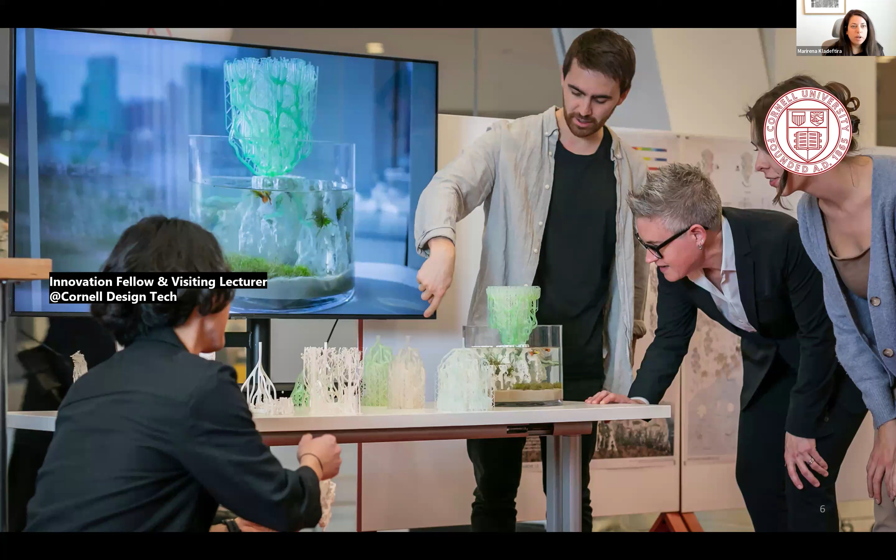And after my PhD, I wanted to change context a little bit to pursue a different research. And so last year, I joined EPFL in Lausanne in Switzerland as a postdoc researcher. And as of this year, actually, my academic home is Cornell. As you heard before, there is a new department of design technology that was inaugurated last year. And this is really a radical collaboration between disciplines in design, sciences, engineering, and technology, where my work is also intersecting a little bit these disciplines.

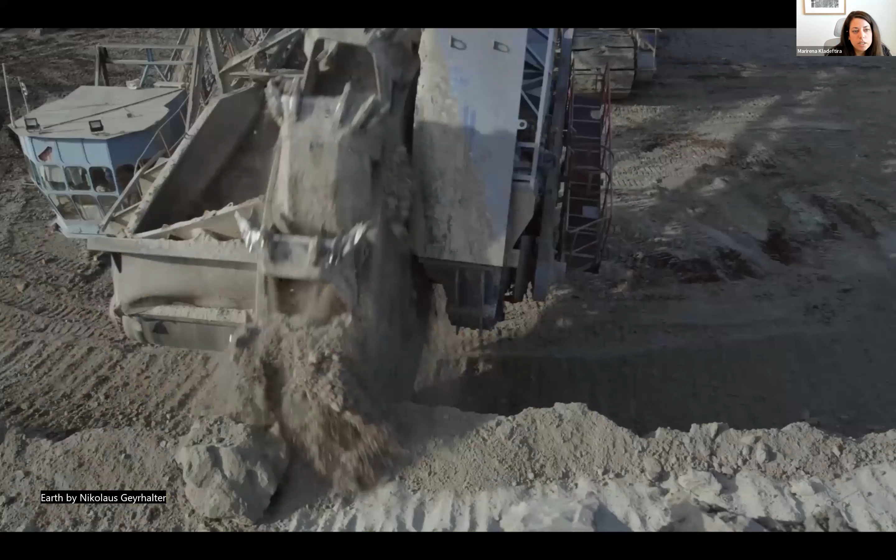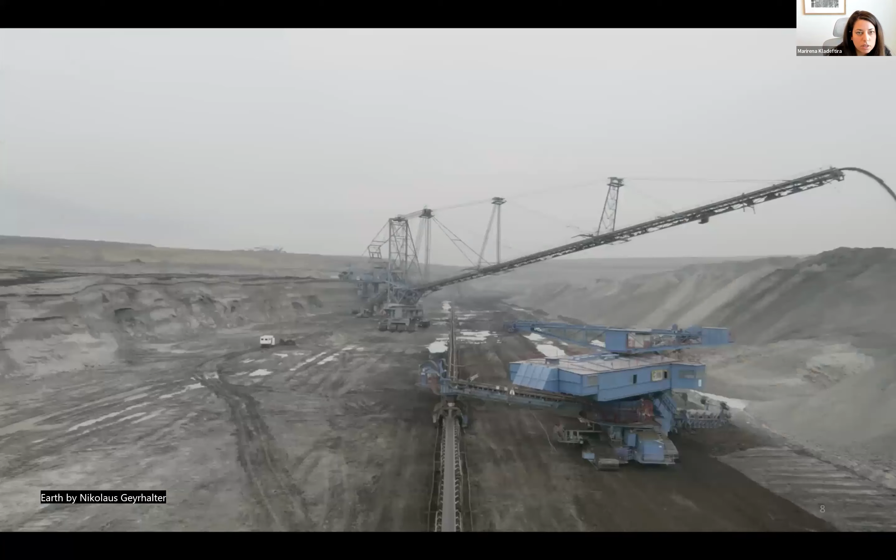So probably all of you know that our practice today is veiled by crisis on multiple levels, but understanding the enormity of the construction demand we are facing, we cannot afford to not reevaluate our building methods. And although as architects over the course of history we have also been actors in constructing these oppositions between our values and our practice, we still continue to drain our natural resources. Construction is responsible for almost half of the global resource extraction and around 40% of the total CO2 emissions. But even though we are aware of the stats, material use in construction is still expected to double by 2060.

And at the same time, we have seen the effects of this impact we have on the environment become more and more vivid every day. We have seen the loss of human life and human production, as you're all aware of, for example, with the recent fires in California, and not only that, in many parts of the world, different kinds of natural disasters are occurring. At the same time, we are aware that in our field, there is a staggering lack of skilled workers.

This is making headlines year by year. We have a problem filling positions. There are articles out there or demands that actually look at decreasing the age limits for participating in construction. So this is also a reality that we have to face.

But at the same time, we do live in a world that is engorged with digital technology; it has become an essential part of our daily lives. And somehow we're still kind of trying to find ways that this will permeate the construction sector and our practice.

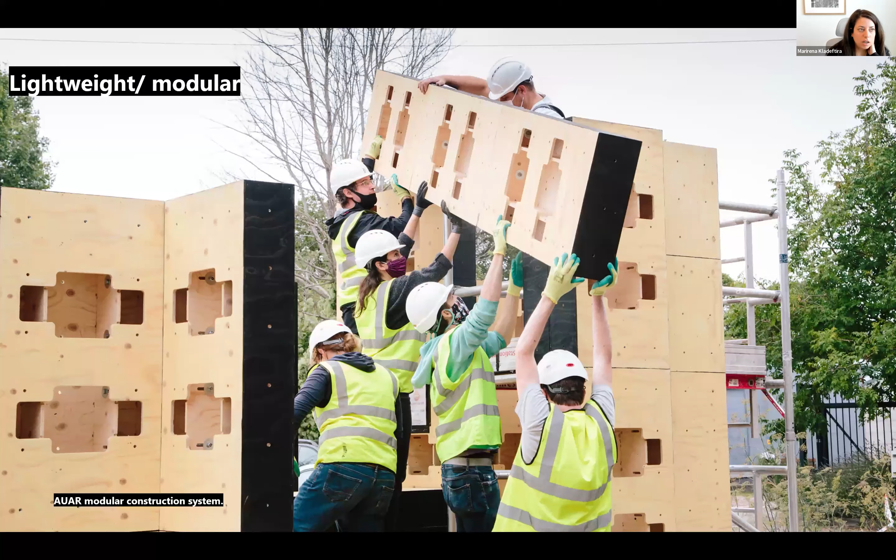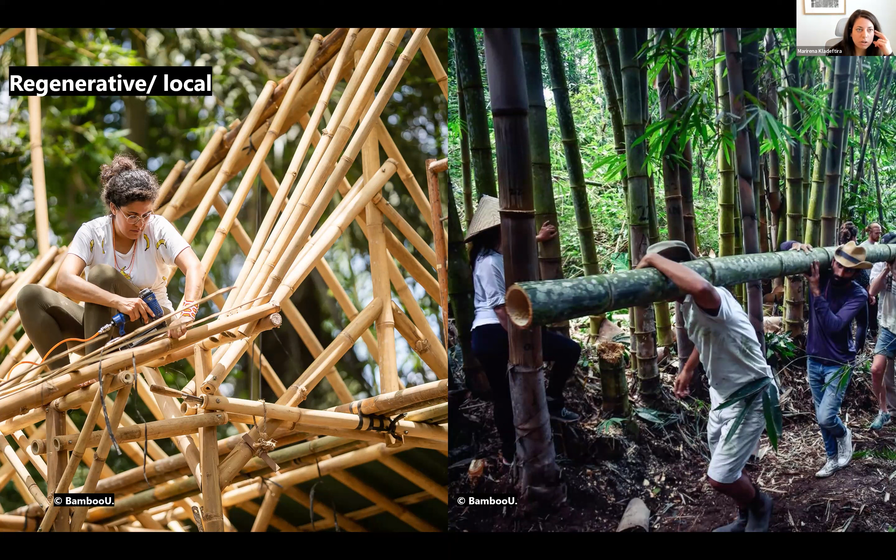A little bit of an overview of what has been happening. So current research streams that are trying to tackle these challenges in construction deal with lightweight and modular systems. Also, they look at the use of regenerative or lightweight material systems that can be sourced locally, potentially, to limit these over-globalized models of production.

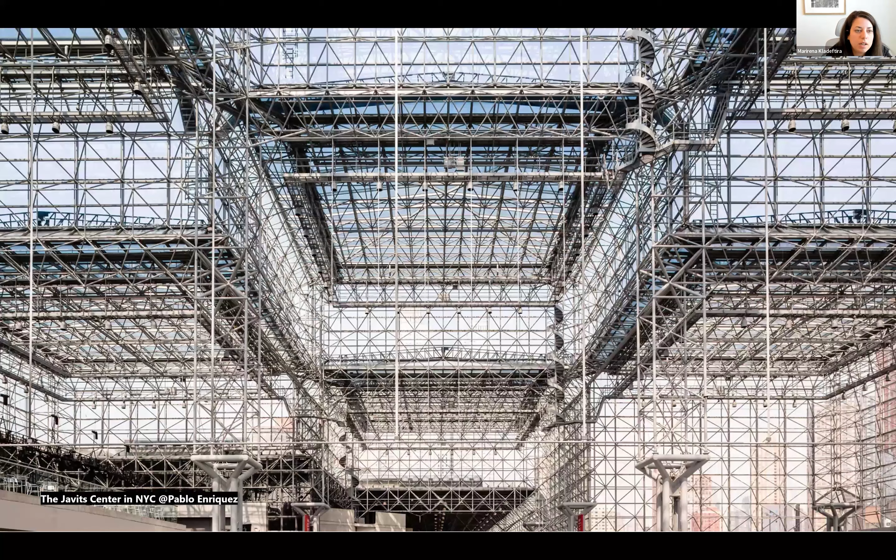And also they look at circular building practices where components can be repurposed for multiple life cycles and promote the use of kit-of-parts systems. Interestingly enough, space frames as a structural system encompass all of these qualities. They are lightweight, modular, they are very efficient structural systems, and they are polymorphous. They can take many different forms.

But we also know that current industrial systems have limited configurations, and that is because they're trying to reduce the logistics and complexity that's associated with their connection systems. And this context and this idea was actually the beginning of my doctoral research, titled Capsules of Complexity, which really reflected this idea that joints in architecture hold a transitional space and act as mediators between materials, forms, and assemblies, but they also articulate space and define aesthetics.

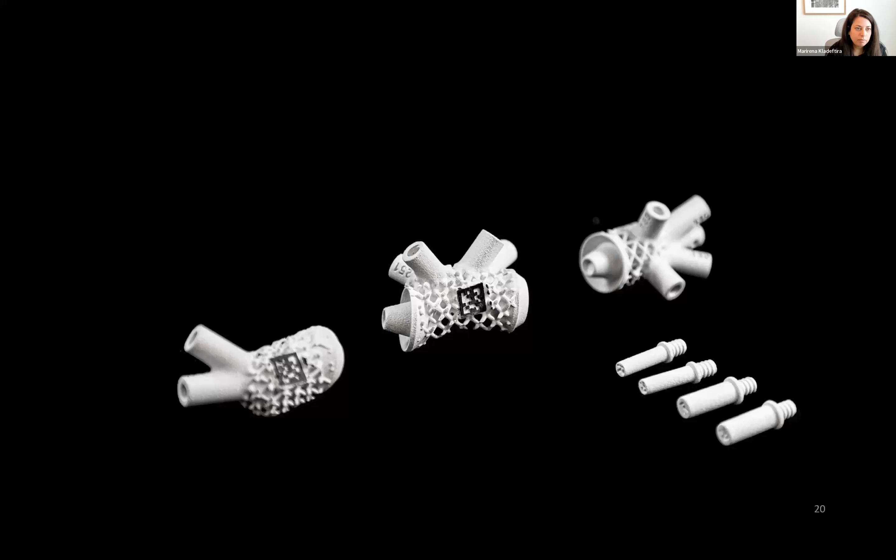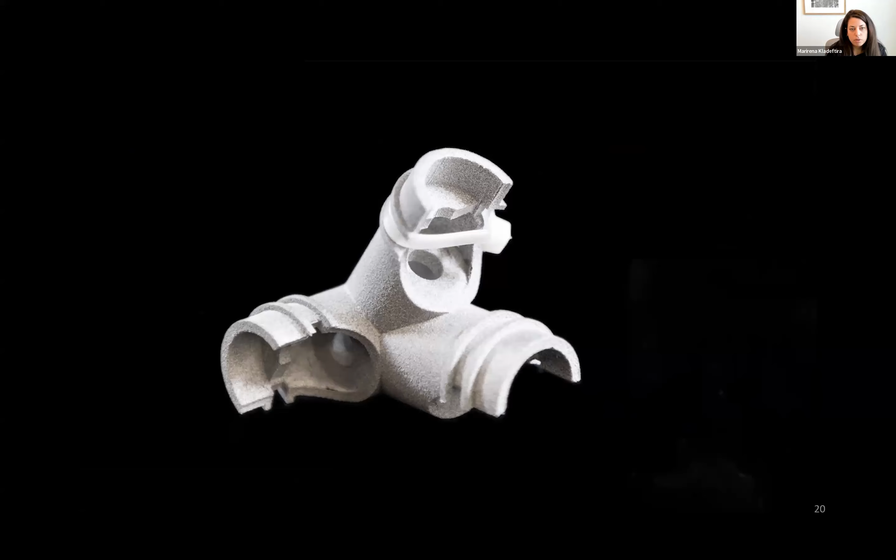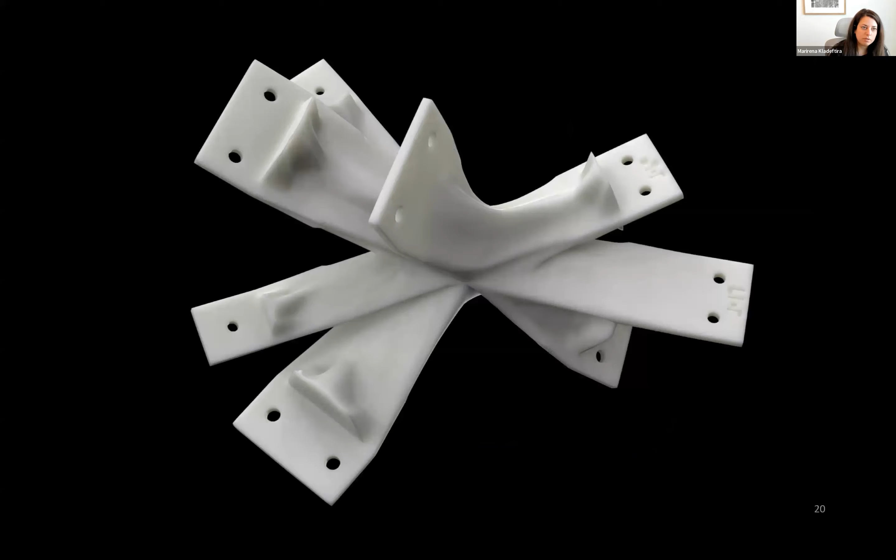And as I said, what is really interesting about the system is that the joints are those components that determine the form, the assembly and disassembly of the structure, and also how circular or reconfigurable that system might be. For me, that really created an opportunity to encapsulate all these parameters in these very small components. So by distilling intelligence only in the joints, we can have maximum impact on the performance and formal quality of the structure. At the same time, with 3D printing, we now have new opportunities to fabricate adaptive structures and components.

But much of the research that had been done up to that point saw these components almost as non-design objects, but rather as optimized engineering parts. So the goal was really, how do we optimize for using less material that we can now fabricate with 3D printing. However, this thinking is removed from the bigger architectural problem, which is that when we design a structure, we employ maybe hundreds or thousands of these connections in one structural system.

And my position here was that there are actually too many factors to consider, and we need to tackle this in a more holistic manner. And so we can concentrate all these parameters that affect the structural system and its footprint around four pillars, maybe, that have to deal with design, the materials that we employ, how we manufacture them, and also the assembly processes by which the structure is erected. Based on those, we can really understand the system better, but also evaluate and contribute better to its ecosocial footprint.

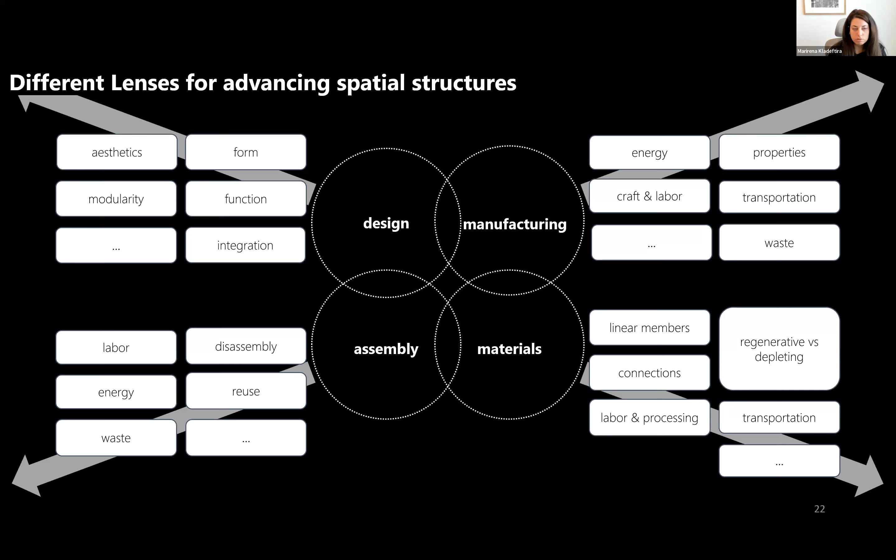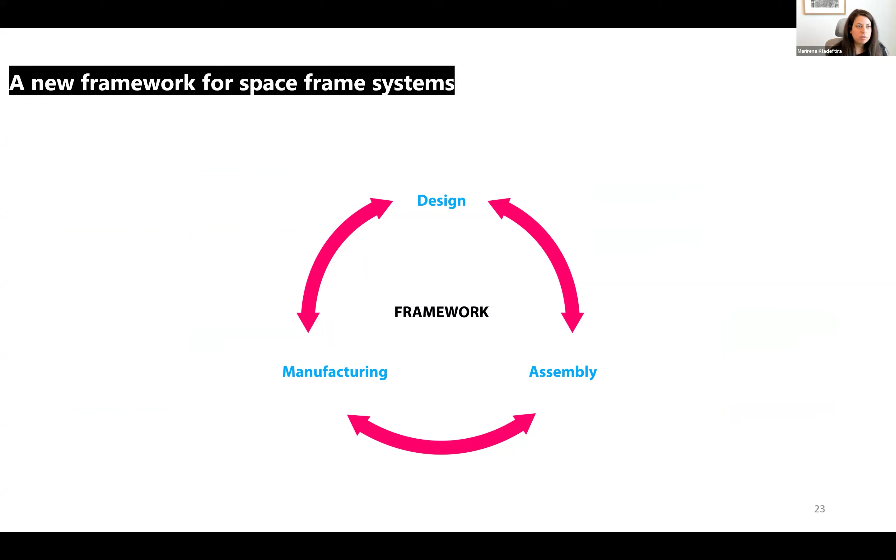And so for my PhD, I created this design and fabrication framework around these three parameters: design, manufacturing, and assembly. And I had the opportunity to test this on different structures and systems that examine different aspects of this framework to achieve ultra-lightweight construction.

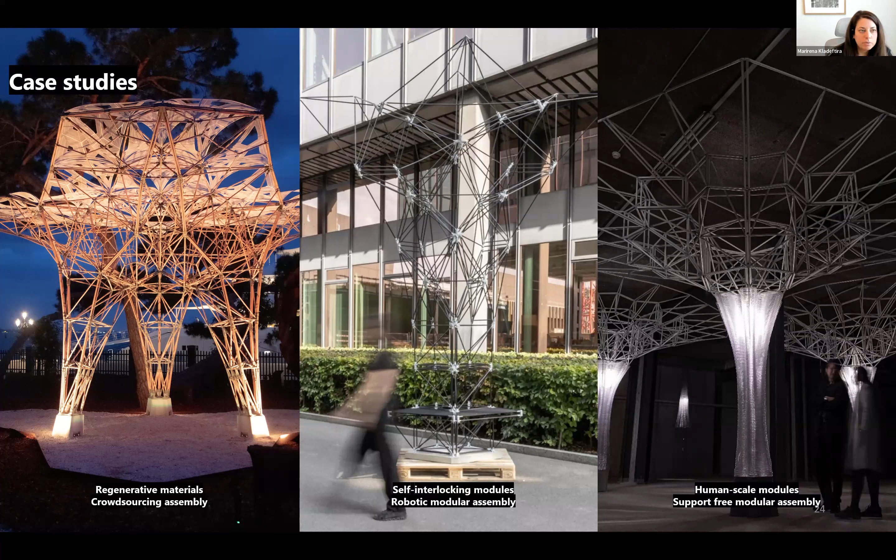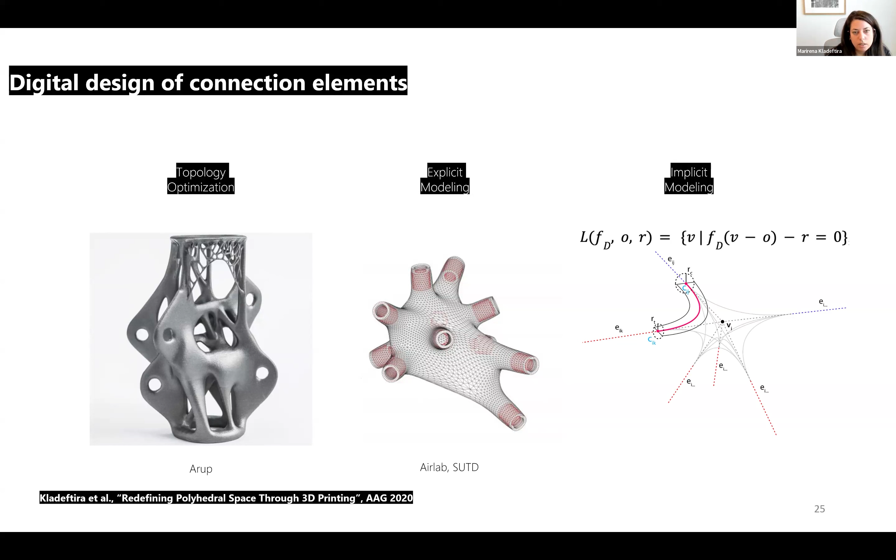So focusing a little bit more on one aspect first, the design. There have been different design methodologies for bespoke connections. As I said, a lot of the existing research looked at topology optimization as a design strategy to reduce material. And other researchers have been looking at the use of explicit modeling, which I will explain in a bit. But my argument was that topology optimization does not really allow for design intention to be embedded within the system, while explicit modeling is more difficult to control and to generalize for a lot of different systems. And so I proposed the use of implicit modeling for the design of connection systems.

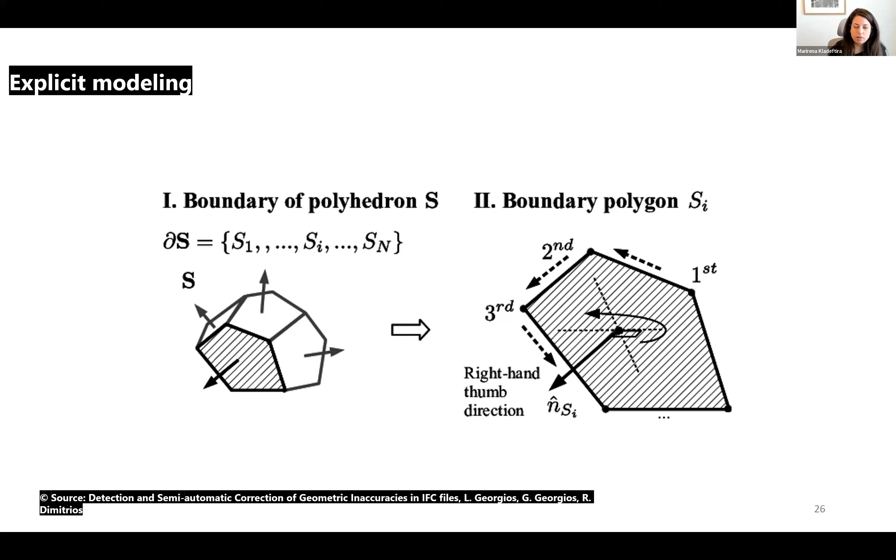So what do I mean by explicit modeling? Explicit modeling really refers to the description of forms with explicit points, edges, and surfaces. You might be most familiar with, for example, mesh modeling or NURBS modeling, where you really describe the outer surface of an object. Implicit modeling defines geometry a little bit differently. It defines geometry as the locus of a distance function in continuous space.

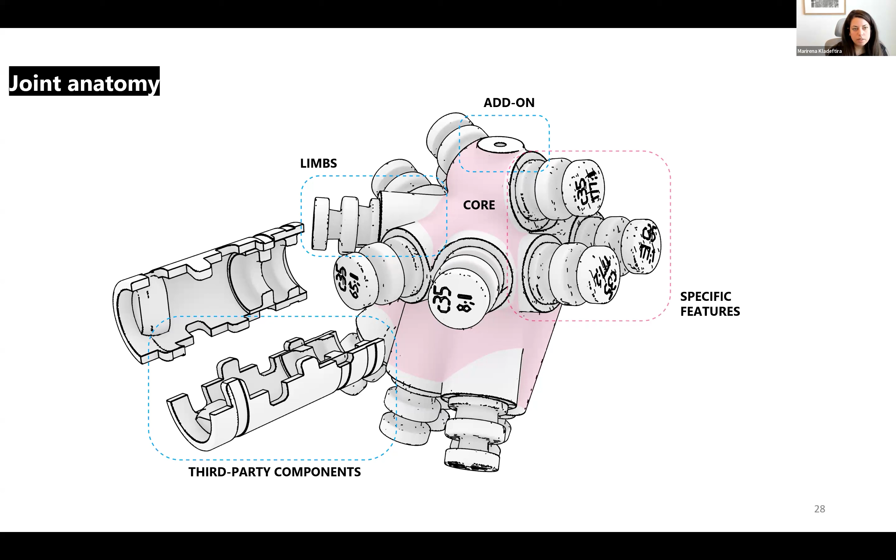That gives us much more freedom to design more complex geometries. So in this case, using this strategy, we can modularize the joint design. By modularizing, I mean we can divide this into discrete functional components that you see on screen, drawing from a vocabulary of details and specific geometric and functional properties that can be combined or fused together at will.

This can be done with just simple mathematical operations and functions, by assigning different parameters and functions that relate to specific geometric features we need at all scales in a computational model - at the scale of the structure itself, but also at the scale of the struts of the space frame, and at the nodes.

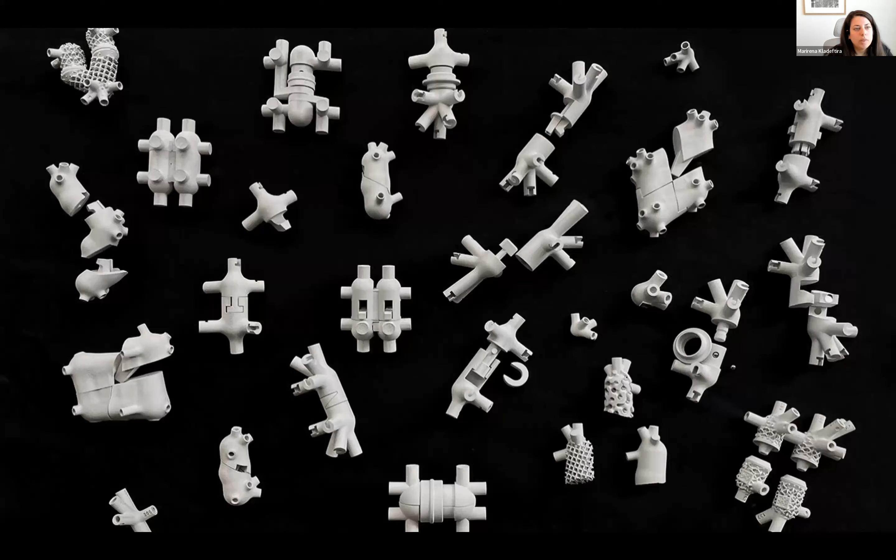In this way, we can really tailor each connection for its specific location in the structure, add special requirements for assembly, or have local transformations and tailor material-specific constraints when working with hybrid material systems, while maintaining a coherent architectural vocabulary. This is an example of how such a framework can be beneficial.

Using this kind of strategy, we developed the Digital Bamboo project. This was a research and teaching project for an ultra lightweight structure made of unprocessed bamboo canes and 3D printed connections. It negotiates equilibrium between biogenic and artificial materials, standard and bespoke parts, and relations of part to whole.

This system is extremely efficient. It weighs only 5 kilos per square meter, but shelters an area of around 40 square meters in this case.

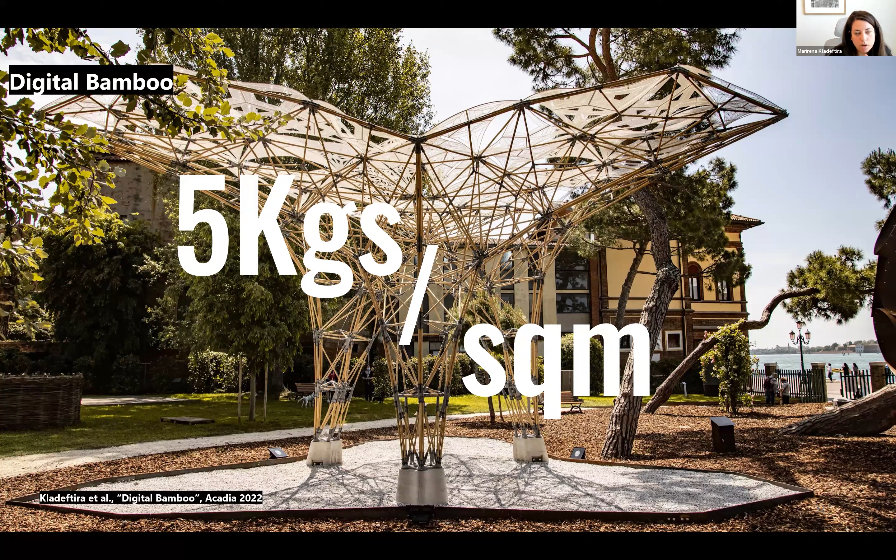Why did I decide to work with bamboo? We know global material use will continue to intensify, but if we look at the data more carefully, most of that activity is expected to happen in the global south. Bamboo is a local material native to the global south. It's scalable and renewable, with a very short harvesting cycle - depending on the species, this can range anywhere from 5 to 10 years. It also has a natural shape that performs very well under axial loading.

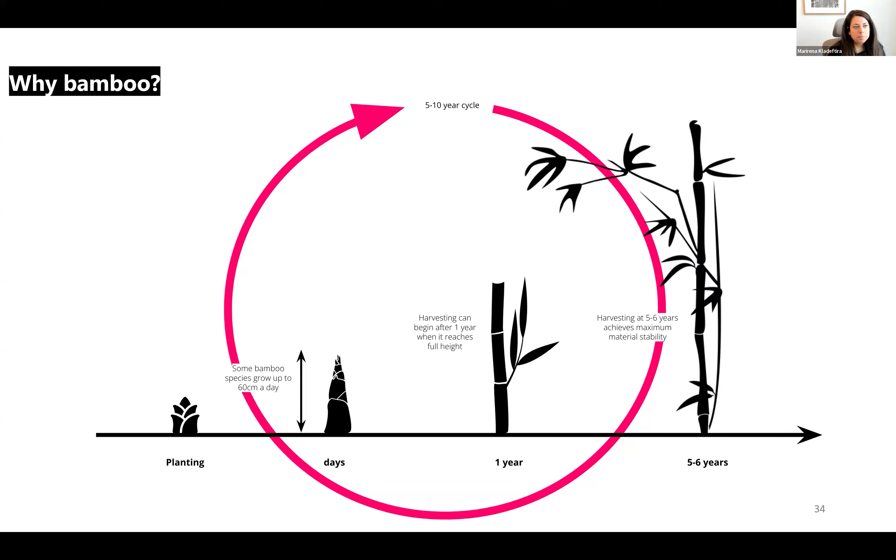At the same time, bamboo still remains a craft-based system today. Often we've seen that the scaffolding structures to create bespoke buildings become more laborious than the structure itself. So the question was: how can we create a system that is adaptive to the natural variability that bamboo has, which is also the factor that hinders its compatibility with standardized systems?

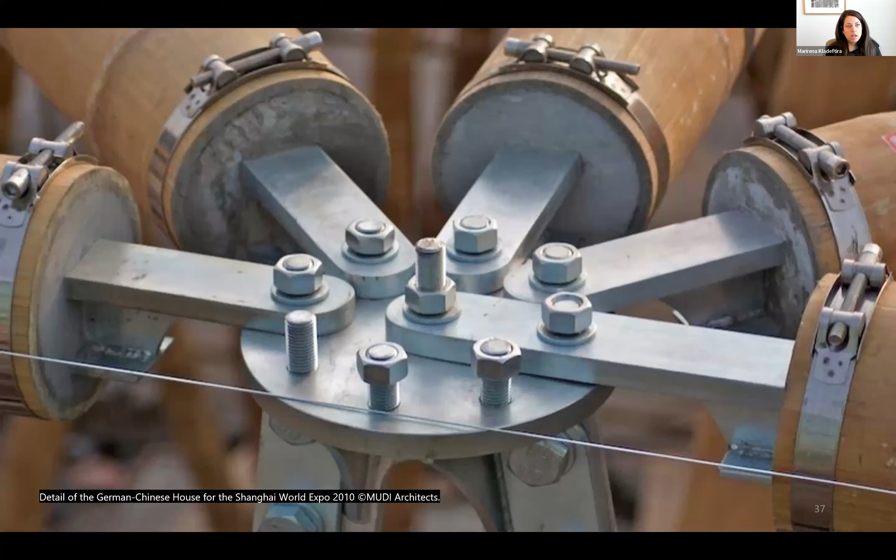When we've seen that attempted, it has resulted in composites like the one you see here, where we often see cement or mortar cast into the pole itself to establish a kind of structural connection with existing pieces.

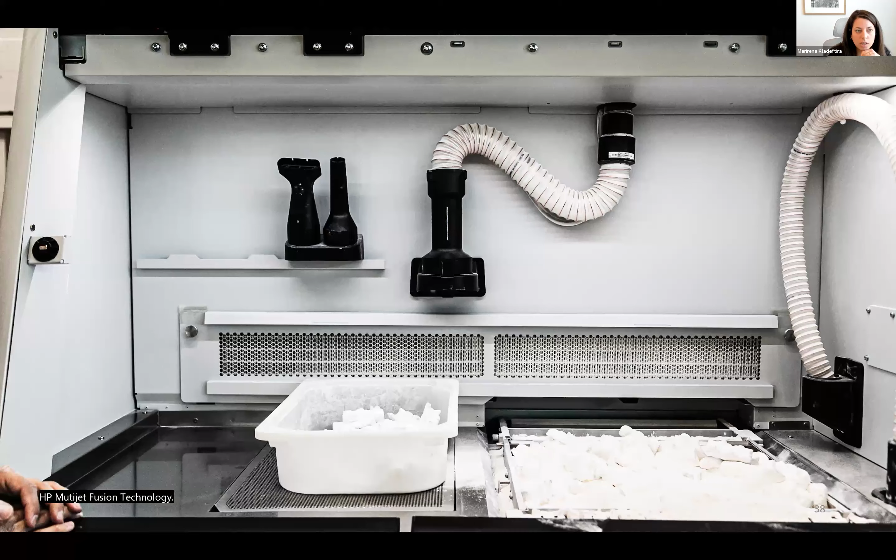Coming back to this framework, we can actually identify a better material pair. Instead of using metal components, which as a material outperform bamboo by a lot, we can find a material with maybe a comparable or slightly better strength than bamboo - in this case, high strength nylon produced with multi-jet fusion technology from Hewlett-Packard.

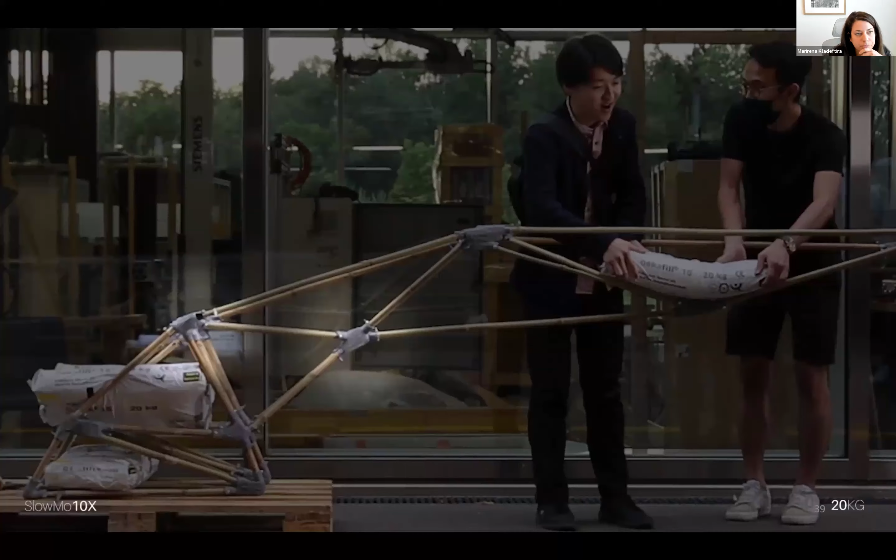We tried to use this technology, and at the same time I was teaching a studio at ETH in Zurich, where with a student we experimented on these new joint systems you saw here. It was during COVID, so we had to test our structures outside, not always with great success.

As we experimented with different connection forms and connecting geometries, we observed something quite interesting. Instead of a regular pin connection often found in reversible connecting systems, we found that notching the bamboo actually performed a bit better in testing, because it distributed the stress over a larger material area.

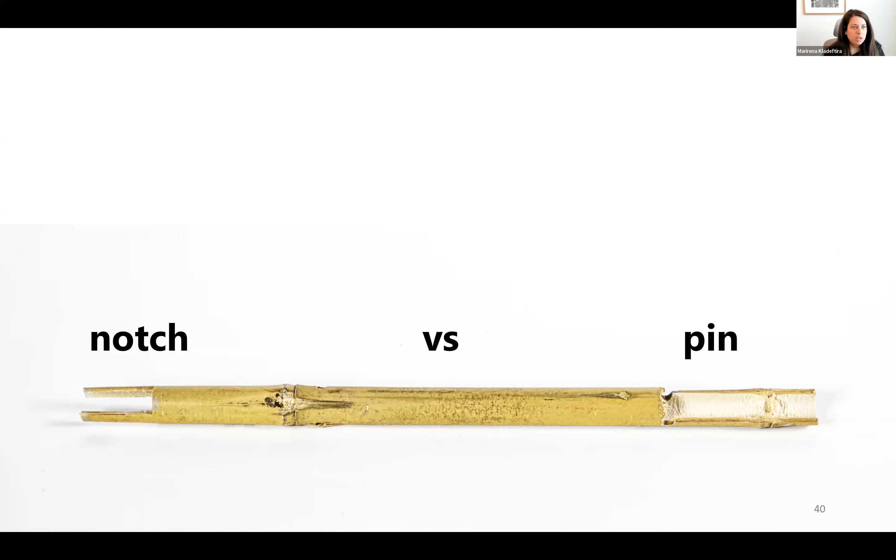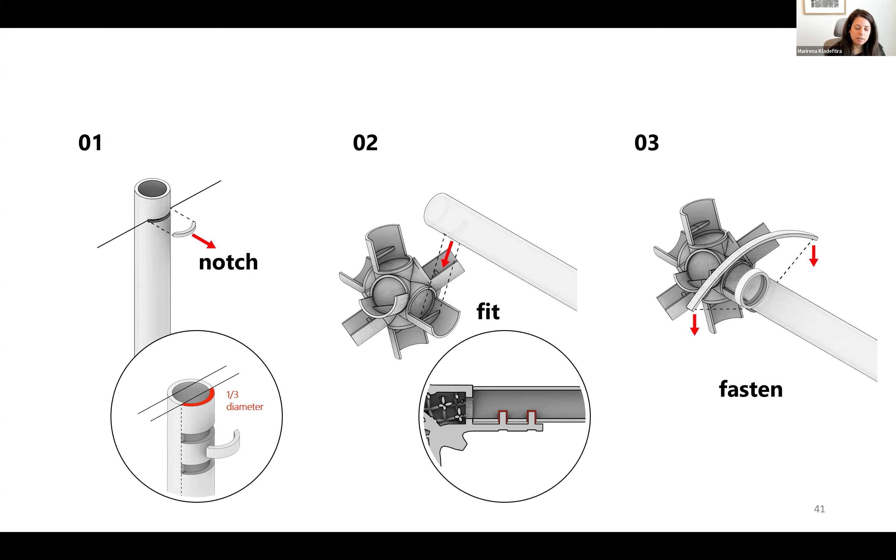So we went a bit deeper into this idea of how to create a system with this notching technique, and also a system that respects easy assembly and avoids processing the bamboo pole itself, as that was a key requirement for me. I wanted to avoid entirely the processing of this kind of raw, variable material.

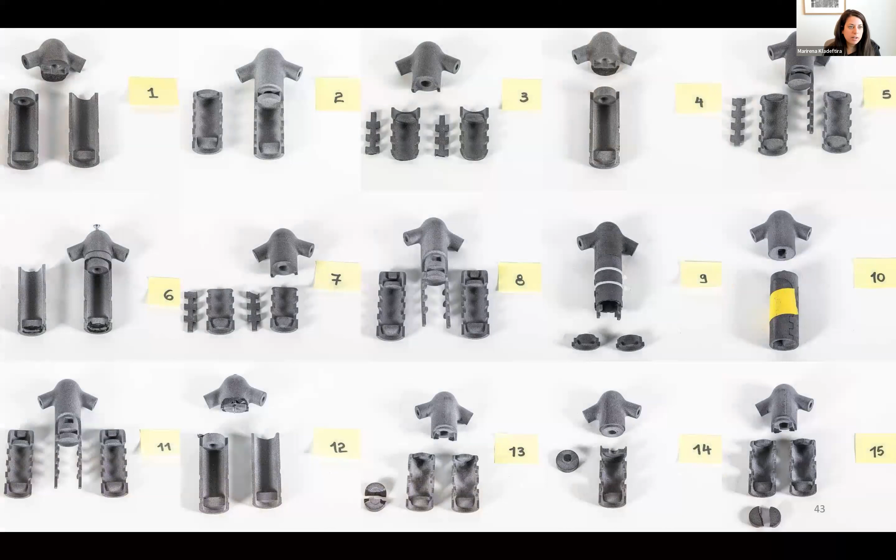I put this video here because I find it extremely funny. This project was developed during COVID, so all the labs were shut down. We had a very new connecting system that we didn't know how it would perform, and we had to become more creative about testing this material system. So we made this kind of haphazard setup that you see here, and with that, we were able to test an intensive series of evolutions of these jointing systems.

We did this by partnering with researchers from structural design at ETH Zurich to understand the mechanical properties, specifically how this connection performs under tensile loading. That was also our design process to optimize this connection for this material, and we were also able to validate it with graphic statics to make sure we have equilibrium in the joint design as well as in the design of the structure itself.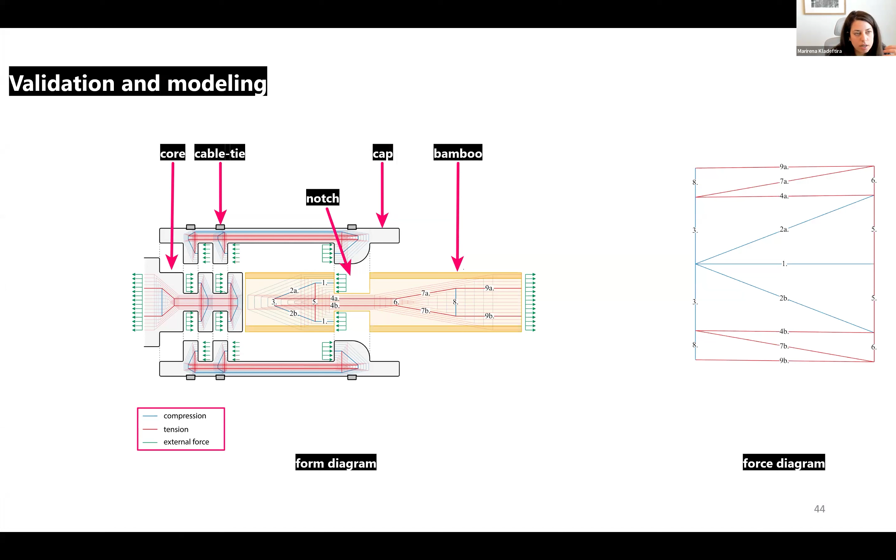The final joint really features a connection to the bamboo through two standard externally interlocking components that you see here. These also feature rotational freedom that helps in the assembly, especially at acute angles or in very complex systems, really capitalizing on human agility to fasten that connection.

At the same time, what you see here is these two parts. We have the core that I showed earlier in this modularized joint design strategy, and that core is always the bespoke part—the part we would need to fabricate differently every time. Whereas the caps in this case are standard, and we could even mass produce those with a different method.

This system was really interesting as we wouldn't need any other special equipment, and we could really imagine employing this in regions where there isn't access to other technologies or specialized knowledge.

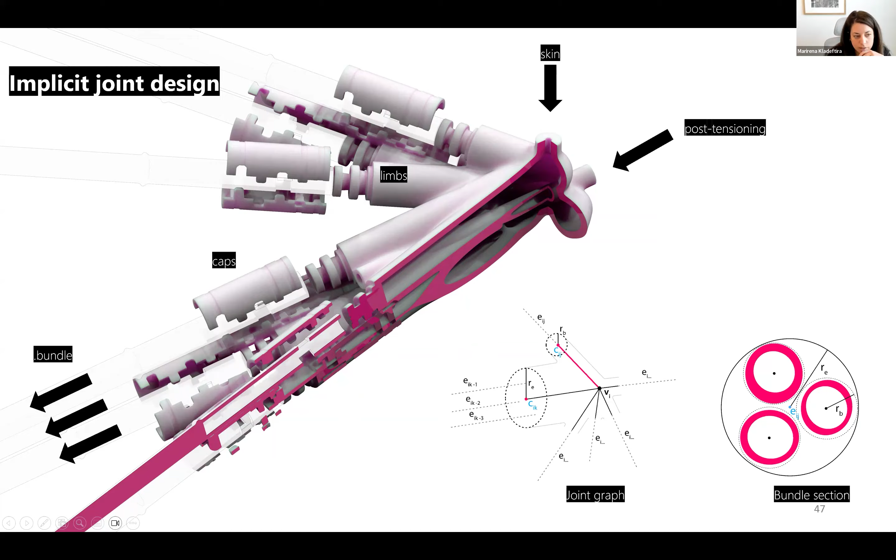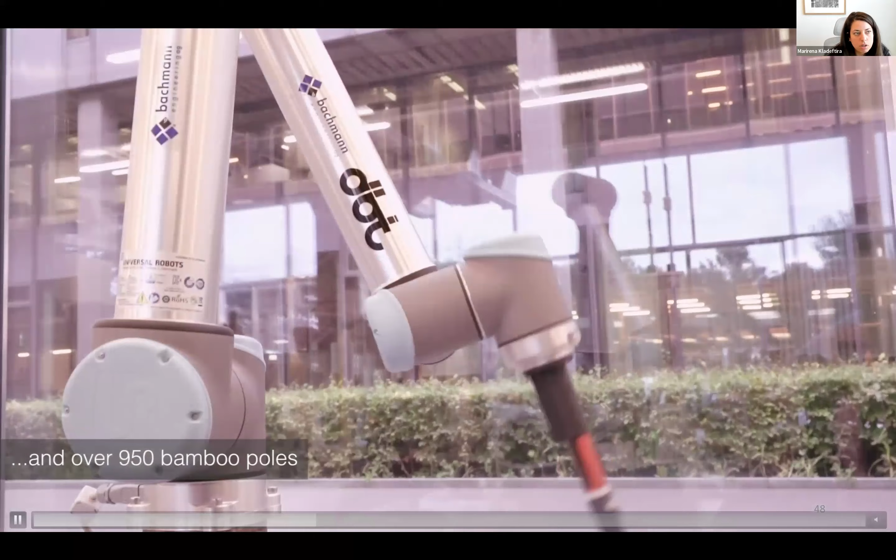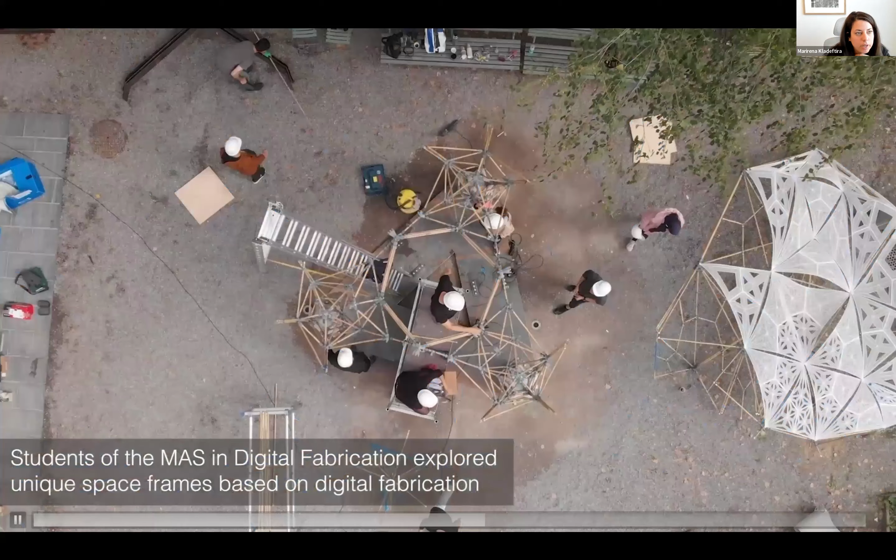I have a small video that shows a bit of the process. What was really interesting is that by using this off-the-shelf technology, we could outsource all the production to 3 different manufacturers. The joint production took only a few days, even though we had, I think, more than 300 joints in total. The skin you see here was also produced in-house.

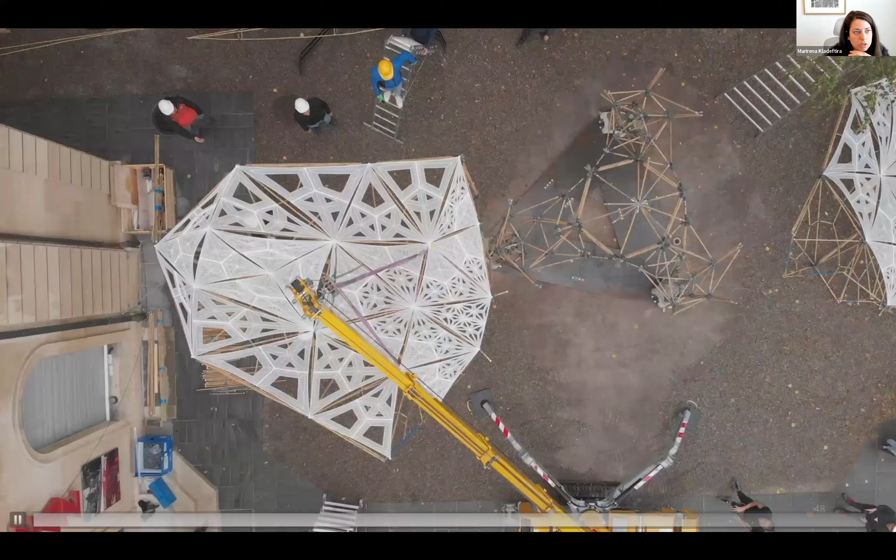We wanted to keep this lightweight theme, so we used a very lightweight mesh textile that we formed on top of stiffening ribs, which gave catenary form to the panels that cover the structure.

After an initial exhibition in Zurich, we were invited to exhibit the structure during the Venice Biennale, in the Time Space Existence exhibition in 2021.

We disassembled the structure, flat packed everything, and transported it all, including the foundation and the skin—approximately half a truck, if I remember correctly—and reassembled it on site. Since the joints were designed for intuitive assembly, we could crowdsource the assembly in Venice to local workers with no prior knowledge of the system, and they managed to build it in under 3 days, which was quite a success in my opinion.

And here you see everyone involved in the project.

So in this platform, we could really showcase how combining unprocessed biogenic materials with small digital components can lead to hybrid systems with minimal footprint on-site time that can also be designed for disassembly.

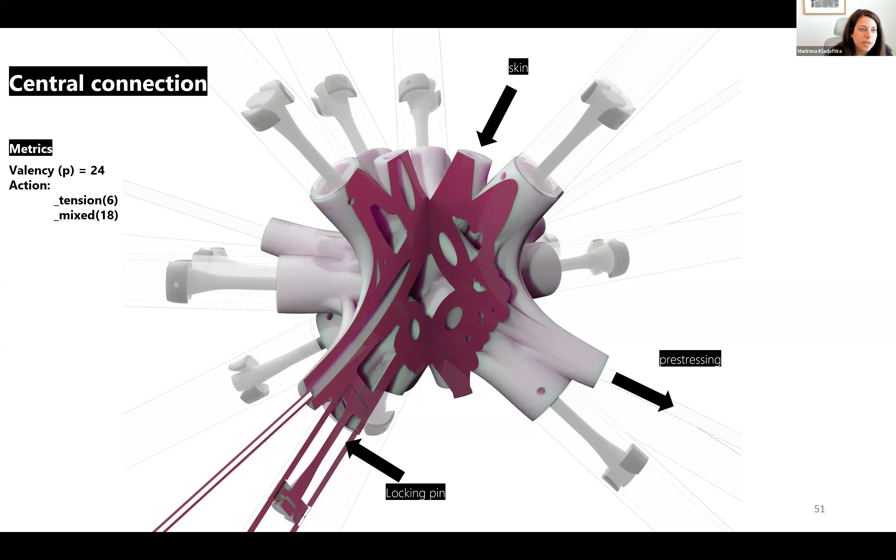Because of that complexity and high concentration of forces, I designed this different joint still with the same framework that I described before, but this time it was specifically designed and optimized for 3D printing in steel with laser sintering technology, which is what you see here.

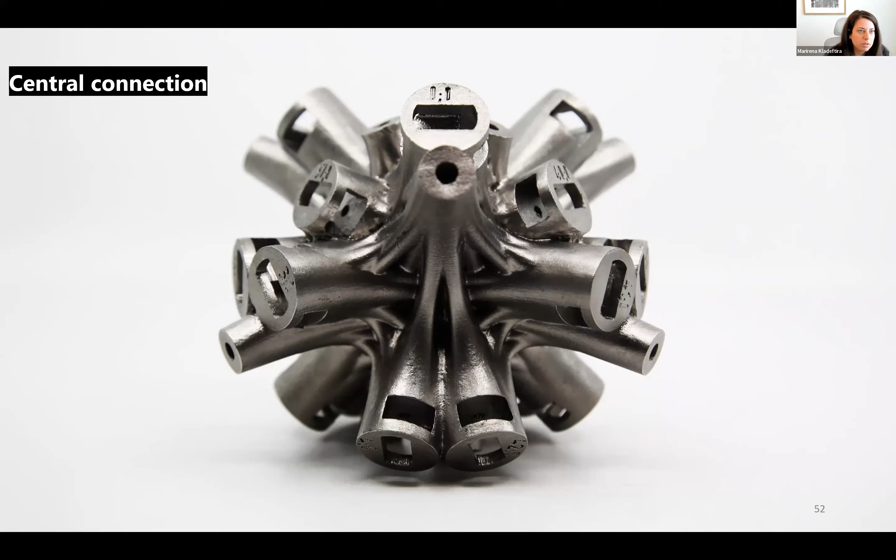Although this 3D printing of steel was only used for this one component in the entire system, it was disproportionately expensive, time and energy consuming than the fabrication of all the rest of the components in the structure. And this really was upsetting for me.

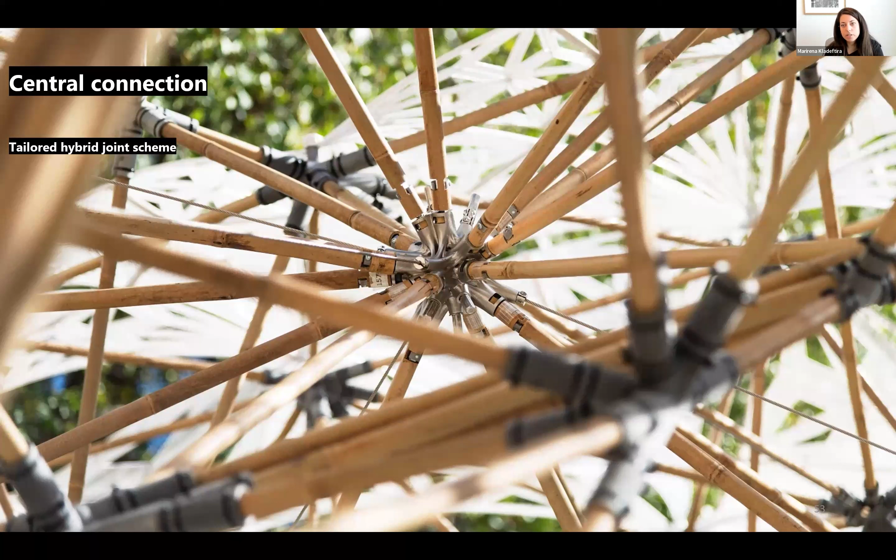So in my search for a low cost but high resolution production method for metallic components, I actually discovered that there is a gap in the industry and existing processes. And so I initiated a collaboration with the German Fraunhofer Institute to look really into complex low impact metal manufacturing.

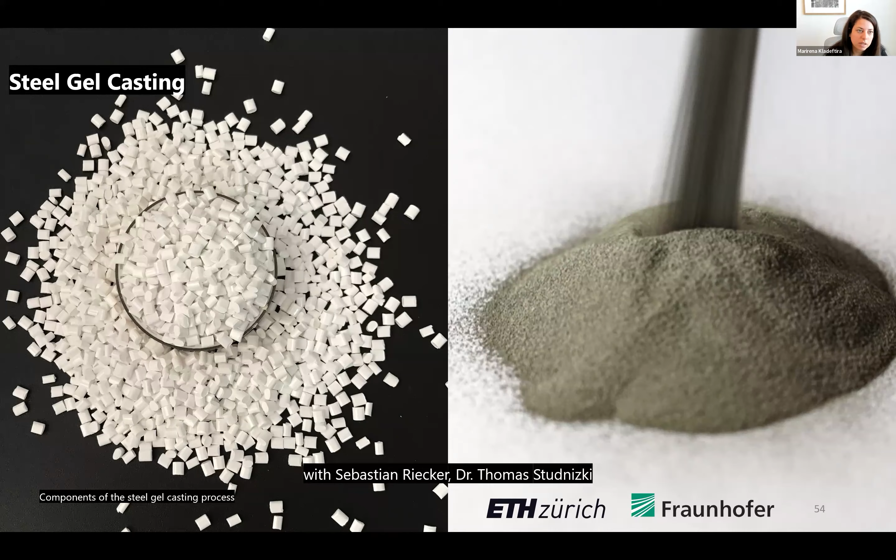Sebastian Riecker is a researcher there at the Fraunhofer and was looking at the time at a process called gel casting, which has been used in the past for the production of complex ceramic parts. The idea really was to transfer this process to steel components that can be produced with low cost and at large quantities.

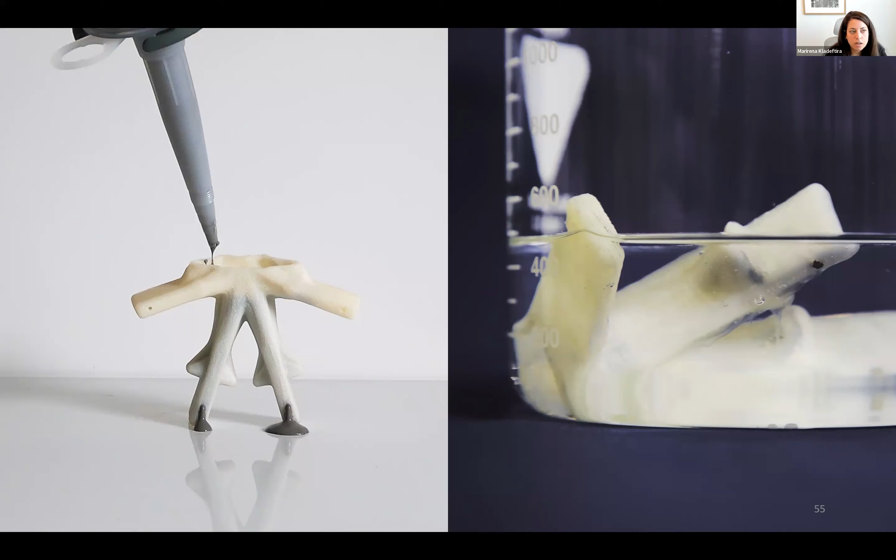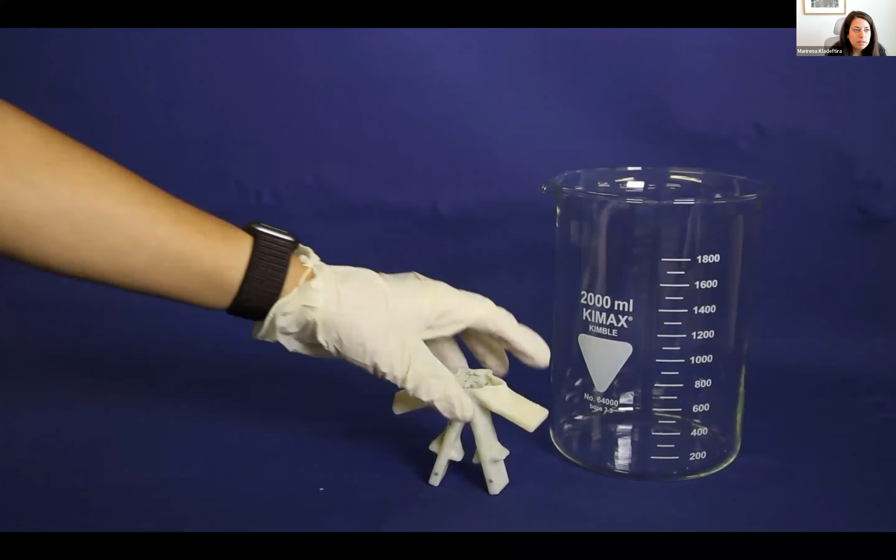So what is really gel casting? We have this aqueous solution that has a high concentration of metal powder, and that is cast at low temperature into 3D printed polymer molds. Then this cast is left to dry at room temperature, and then this is introduced into a solvent bath where the mold is actually dissolved, and this exposes the green part.

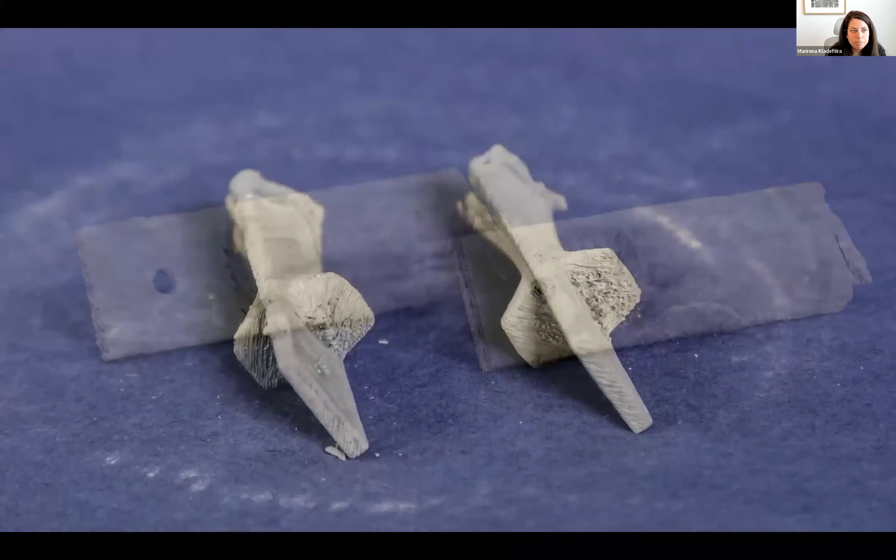Then the green part is introduced into an inert oven with specific controlled temperature and atmosphere, and then the part is degreased and sintered.

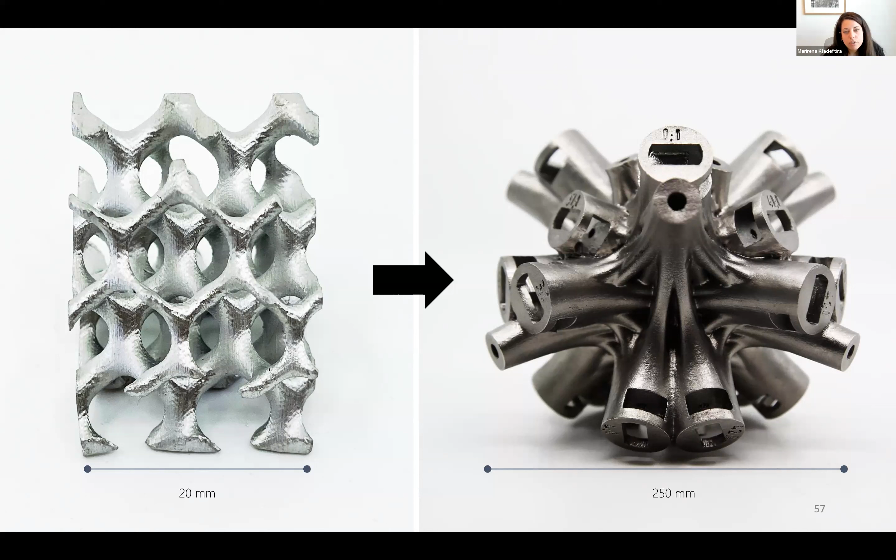What was the challenge here? Our initial experiments were only these tiny parts. If you ever work with material scientists, this is already a success for them - like this 2 centimeter piece, complex piece, is already a big success. But of course, such sizes are not really relevant for architecture.

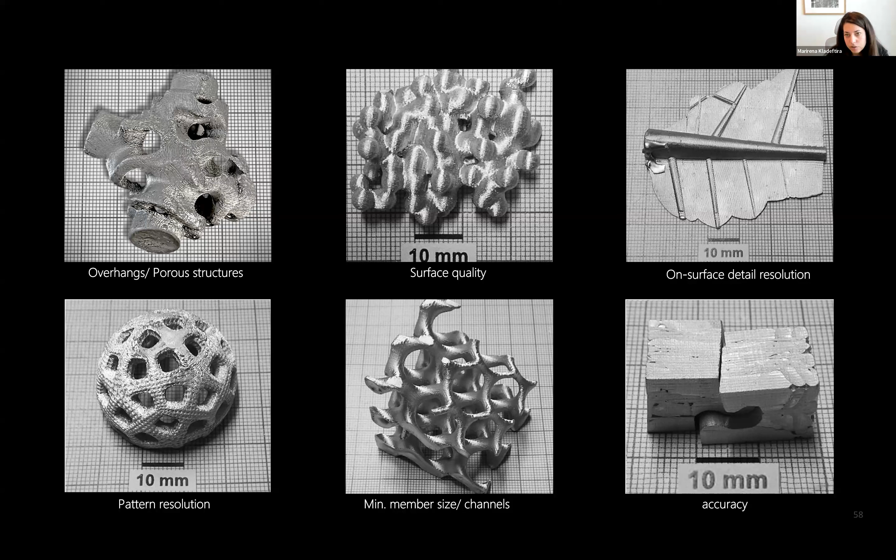So we started to think, how can we scale up this process to make it relevant for architectural scale? I had some material saved at home and started doing some more fundamental tests that may seem random here, but actually they try to find the relevant properties that you would get in your material specs leaflet for any 3D printing technology - things that have to do with surface quality, minimum resolution, resolution of on-surface detailing, accuracy, and so on.

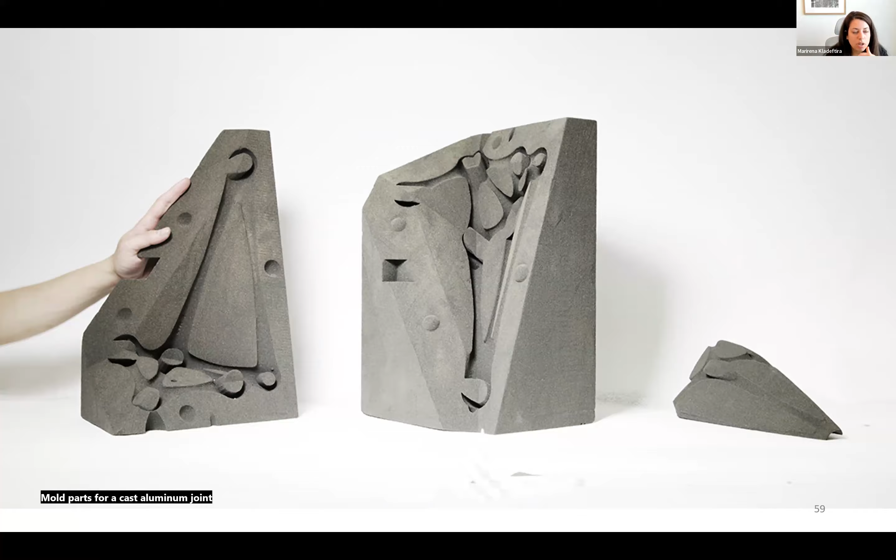At the same time, I was also lucky enough to have a lot of experience in mold making for metal castings, as I had done some previous projects in the past, and also had worked closely with foundry workers to understand the logic of mold making techniques for complex shapes and what needs to be optimized and accounted for when you have more complex geometries.

The takeaway from that was actually to try to derive a mold making process specifically tailored for this metal manufacturing of steel gel casting. So I worked also with a student to try to automate that and create a set of rules for this computational mold making that you see here.

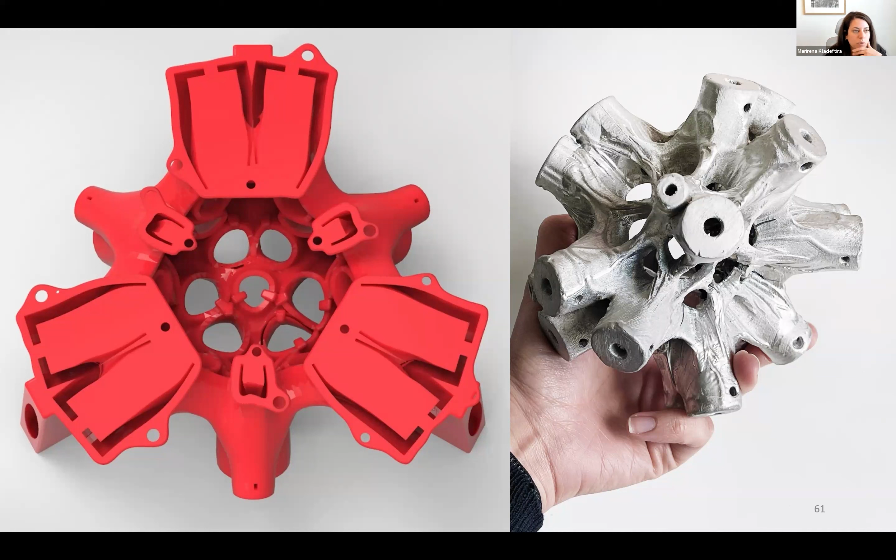After about 6 months of trial and error, we were actually able to cast and sinter successfully a node for the same function as the one that you saw earlier in the digital bamboo, but with only a fraction of the cost. What was also very interesting to me was that the first iteration of that connection weighed almost 4 kilos, but with steel gel casting, we could reduce it to a third.

That success was really due to the limitations of existing laser sintering methods, which actually require a lot of internal structures and supports to support the part during the fabrication process. Many of those, because they are entrapped within the geometry, cannot be removed in the post-processing stage. So you end up with a lot of excess material that you might not actually need.

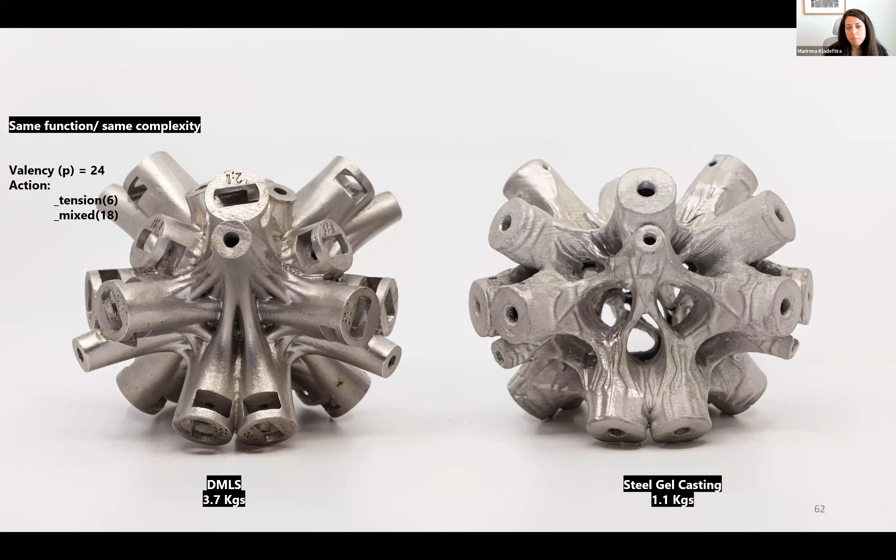But with steel gel casting, because of the freedom that you're allowed with 3D printing technology and dissolving the mold, you can actually bypass all of that and create complex shapes without any support structures, and then batch sinter them all in a sand bed later.

Earlier I talked about how assembly also affects structure, modularity, and joint design. The previous project was specifically designed for crowdsourcing the assembly of structures. But if we look at how industrial space frames, especially bespoke ones, are erected today, we can see that the safety of workers is often at stake. They often hang at incredible heights to fasten or weld parts on site.

At the same time, we often see the scaffolding works required for more complex shapes. They are so dense that we essentially build a structure twice. To question these practices, I started looking into how we can employ robotics to assemble structures support-free, eliminating any support required, and relieve the human from this process of fastening joints at great heights.

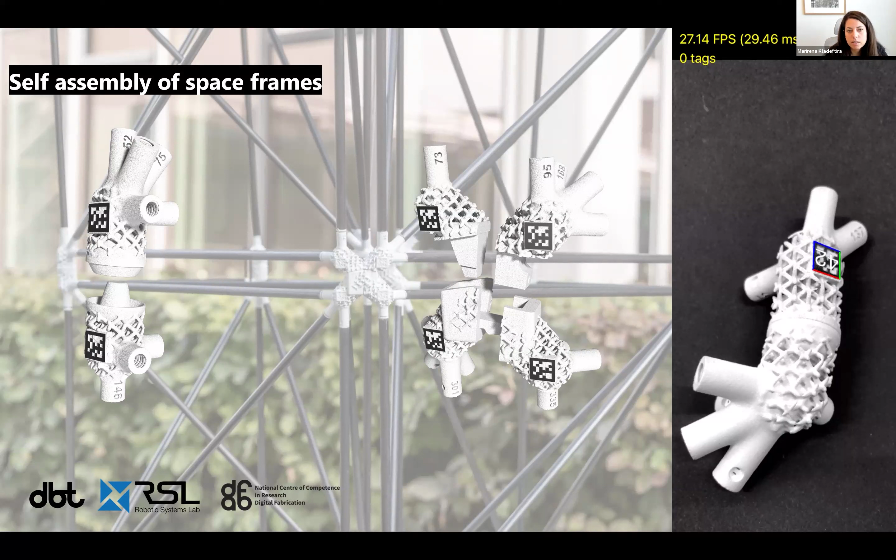In the interest of time, I'll skip this project, but these were fundamental investigations of multi-interlocking parts that formed the discourse for the next project I want to present, which is Protoplasto.

This project pushed even further the limits of lightweight construction, minimizing the material used to achieve assembly for the limited payloads of aerial robots or humans that would need to assemble this structure very quickly.

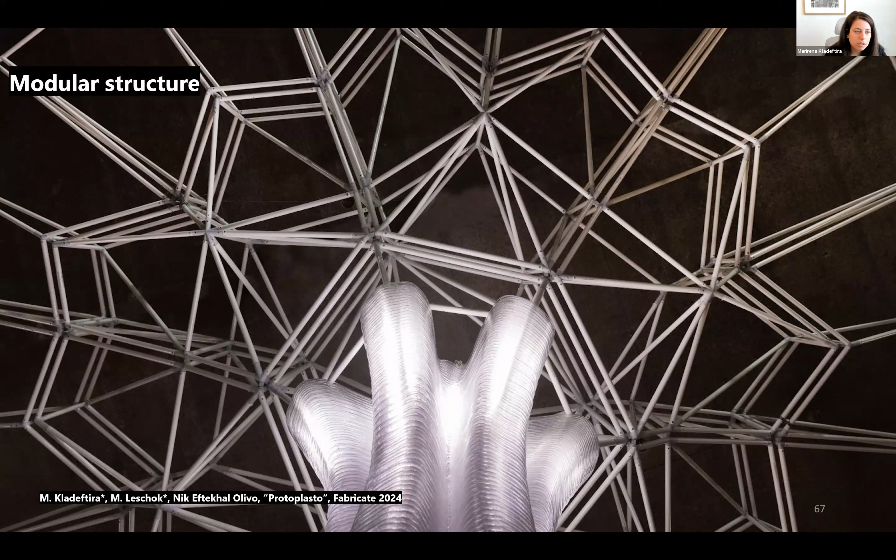Protoplasto actually means 'the first formed' in Greek. It's an ultra-lightweight media installation composed of a modular radial space frame, shown on top here, that can be assembled scaffold-free, and is also supported by lightweight 3D printed columns, which I'll detail in a bit.

The modular space frame of the canopy was formed with a set of cantilevering meridians and a set of parallels that define both the assembly layers of the modules and the structural system in a way. We then applied an internal subdivision to stiffen and further discretize the modules that need to be assembled.

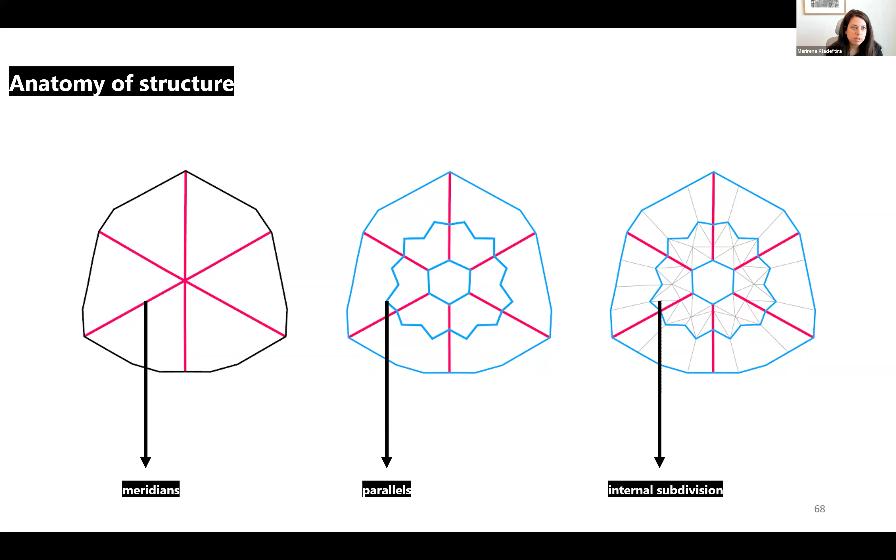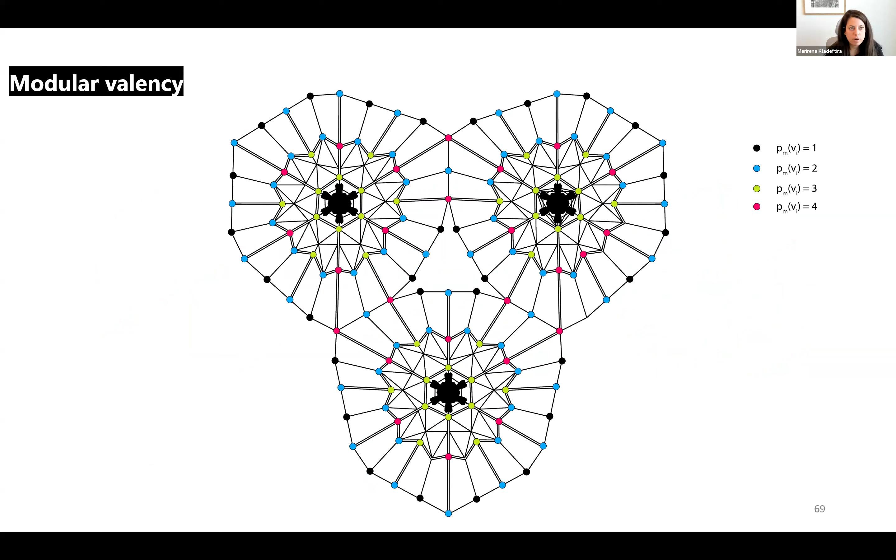Although it seems quite straightforward, what you see here is actually the modular valency, how it varies through the structure, color-coded. If we blacken this out, you can really see the variability of typologies of connections needed, and the interplay between them, to achieve such a modular assembly scheme.

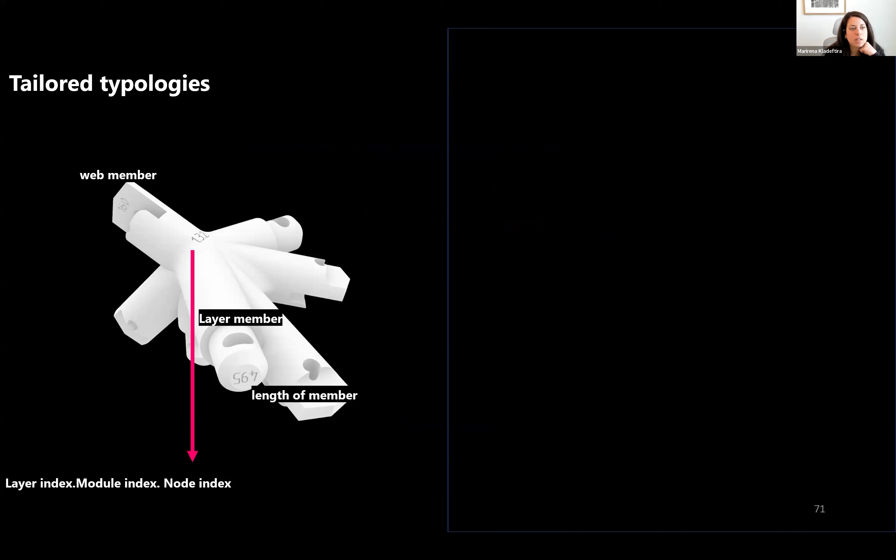Using the same computational design framework I've been discussing, we can assign any of the required joint typologies or connecting systems to each of the color-coded points you saw before. We have intramodule joints with specific details for layer and web members, and primary modular joints designed for this semi-constrained assembly, which I'll show in a bit.

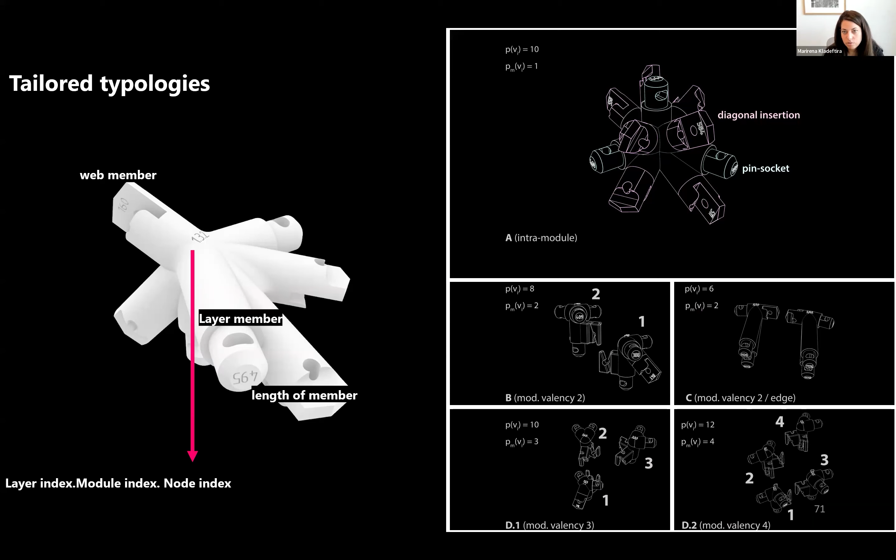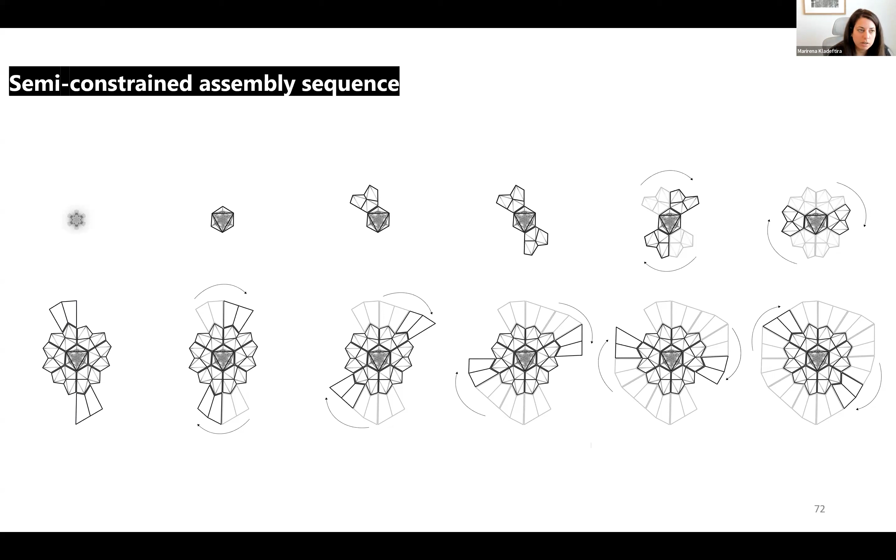We also have modular lateral connections that are only applied to the outer ring of the structure. By employing all these variable connections, we achieve a radial modular assembly scheme, thanks to this self-interlocking, increasingly interlocking system of joints.

What was interesting was again pushing the agenda for lightweightness. Each of these modules weighs anywhere from 3 to 5 kilos, so it can be easily picked up by a single person, or we could imagine robots or drones assembling it with such low payloads. We don't need any heavy equipment or support structures to do that.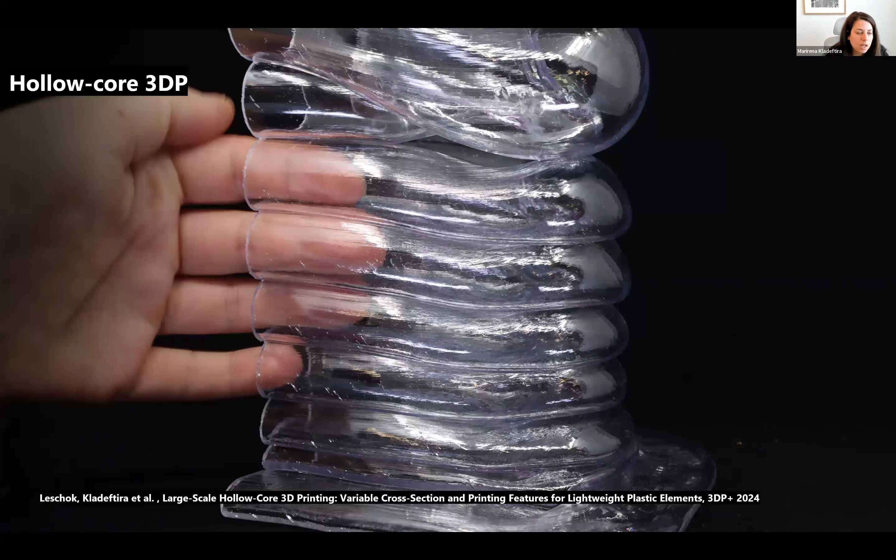At the same time, because the roof is so lightweight, we had the opportunity to push the material limits of the columns themselves. Instead of using a regular 3D printing technique for those bespoke columns, we used a new method called hollow core 3D printing, which prints hollow tubular shapes instead of the massive beads a regular 3D printer would extrude. We achieve strength by taking advantage of the strength of tubular shapes.

With this invention, we can achieve very high build-up rates, printing one 2-meter column roughly every 4 hours, which for polymer printing is very fast—actually comparable to 3D printing of concrete in this case.

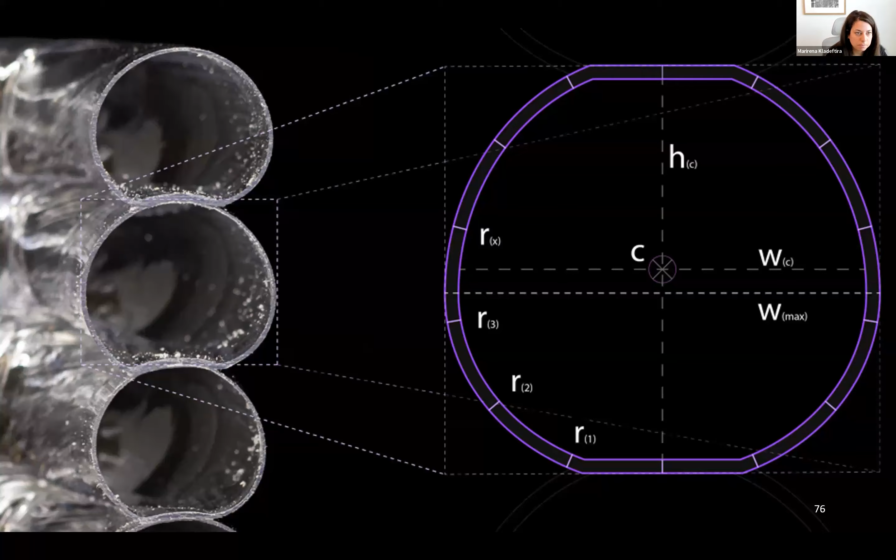At the same time, using hollow core, we can also achieve higher transparency than normal 3D printing. We took advantage of this quality to embed the lighting of the installation within the columns, allowing it to shine through the pavilion itself.

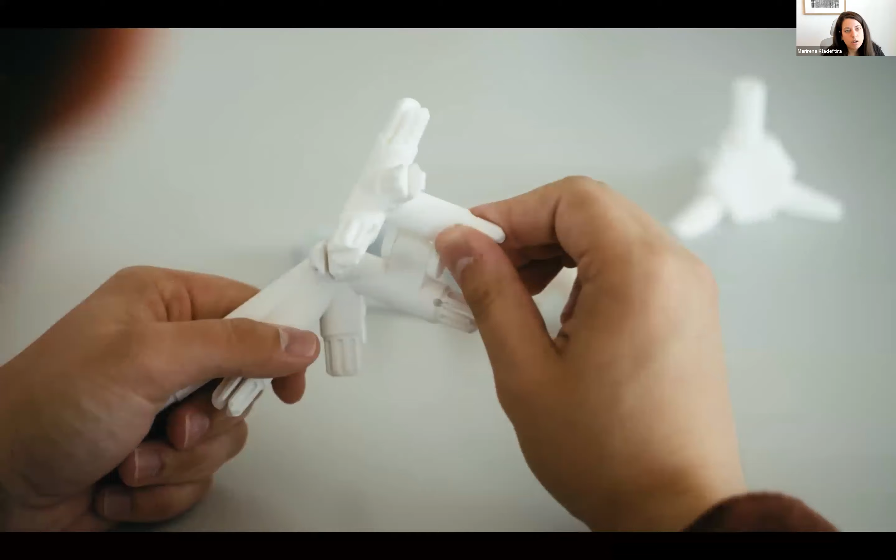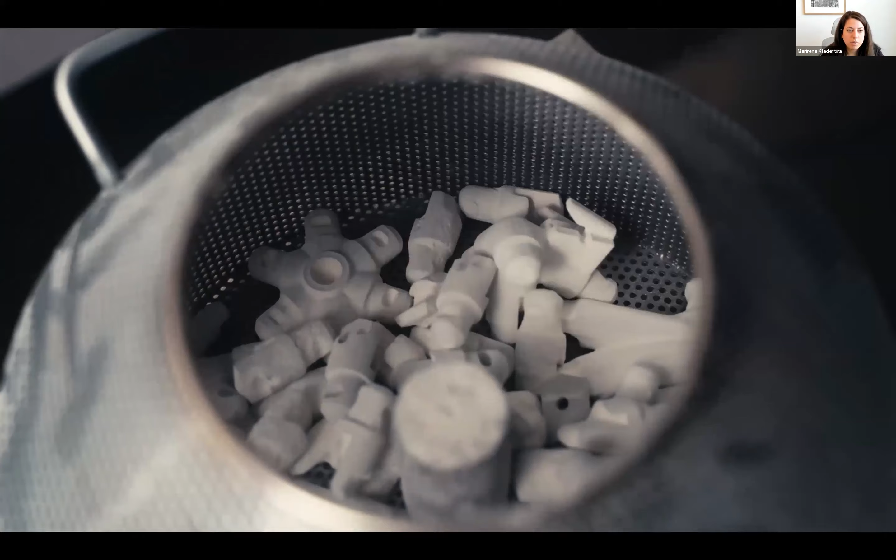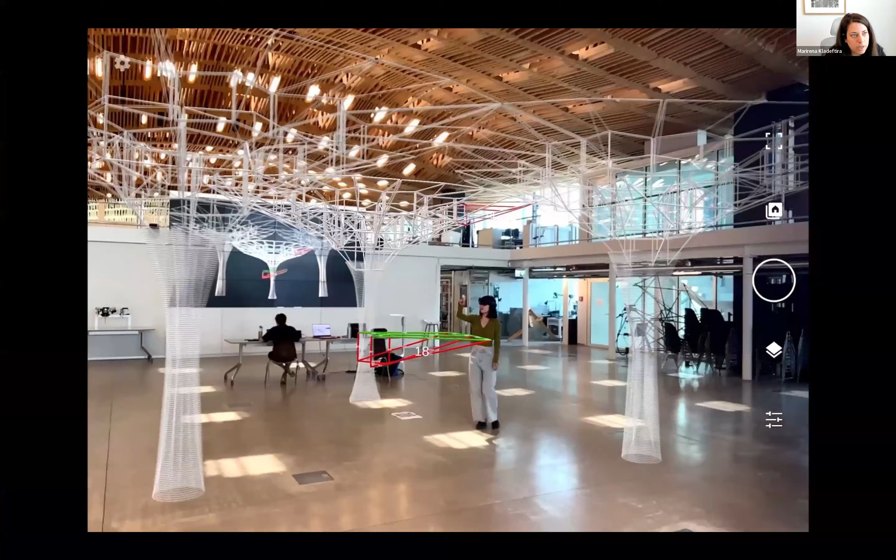In this case, it was a combination of research and teaching projects as we tried to bridge both worlds together. The initial design, we started experimenting with students again at ETH. We acquired a printer at the same time, so we could fabricate all parts in-house. We didn't need to outsource anything. You also see here students experimenting with AR assembly and how that could inform the human building the structure.

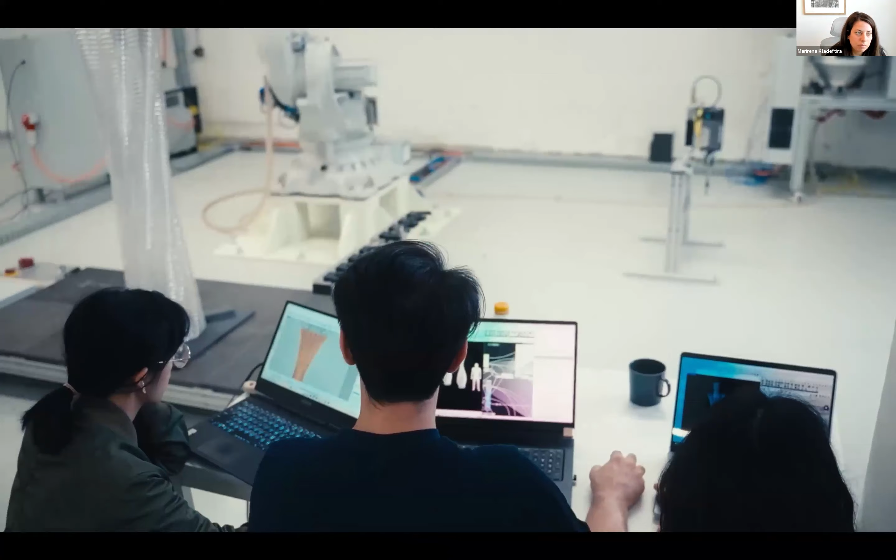We initially called the system the one human roof, because it is so lightweight that it can be assembled by a single person thanks to this bespoke connection system.

To give a bit of perspective, your typical space frames weigh between 20 to 25 kilos per square meter. The bamboo structure I showed before was 5 kilos per square meter, but this structure you see here weighs actually only 3 kilos per square meter.

We decided on this hybrid material system because we wanted to give a new perspective on synthetic materials for architecture, which have been vilified in the face of sustainability, by minimizing resources to absolute necessity, designing for disassembly, and ensuring that all materials can be recycled.

I've only shared a glimpse of a larger multifaceted work, but I'd like to end by highlighting the cross-disciplinary aspects of these projects, which isn't always discussed enough but has been the key driver for developing many of these systems that cross and bridge disciplines. I believe it's imperative to find synergies between these different fields in the sciences and humanities, to shift from just architectural making to the creation of architectural systems that respect both technological and economical limits, but also social aspects like labor, access, equity, and craft.